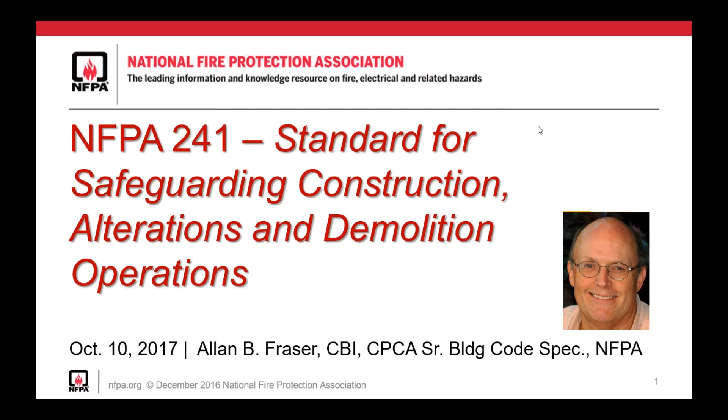Now, I'll ask you a quick question, and I know you can't answer it, but I'll give you a couple of seconds to think about it. When did NFPA, which is the National Fire Protection Association, begin to develop the standard NFPA 241 for safeguarding construction, alteration, and demolition? Now, while you're thinking about that, let me give you a little background. NFPA has been in business for about 118 years. NFPA was founded in 1896, and we develop hundreds of codes and standards for the built environment.

Now, the first National Building Code was published in 1905 by the National Board of Fire Underwriters and was immediately adopted in a number of big cities. Well, NFPA 241 about safeguarding stuff being built actually was started in 1930. It's been around for 85 years. This is part of the fire record, which was in that 1930 edition. And if you look at the top, it talks about fire resistive construction.

Now, all these fires were in New York City, and this is what brought people's attention to this problem. In a couple of decades, there were some major fires there. Vanderbilt Hotel, 1912, the Pennsylvania Hotel in 1918, et cetera. And then down below, there were a number of buildings that were ordinary construction, meaning they had wood structural members in them, and the dollar values in those.

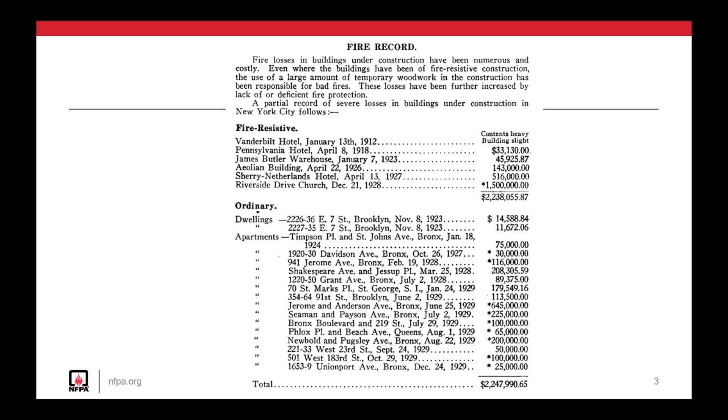Now, many of you know the name George Santayana. Very wise man, wrote many books and taught at a number of colleges and universities around the world. And from his Life of Reason in 1905, he wrote that those who cannot remember the past are condemned to repeat it. And unfortunately, it's true. If we think about those fires that started NFPA 241, more recently in 2015, the AvalonBay complex in Edgewater, New Jersey, lost 2/3 of its 235-unit complex in a major fire. There is no estimate on the damage of that fire at this point.

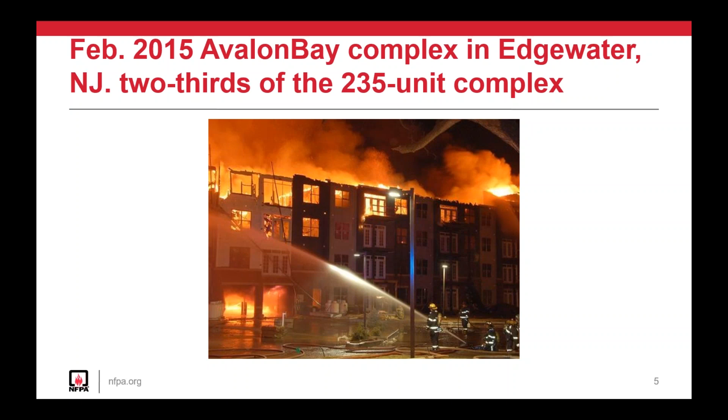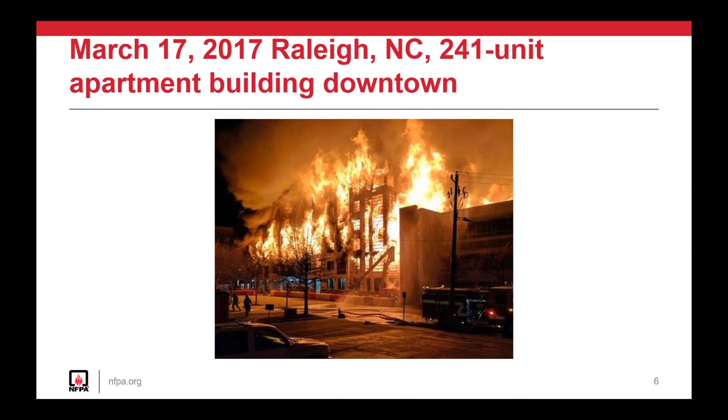March 17th of 2017 in Raleigh, North Carolina, a 241-unit apartment building burned downtown. On March 21st of 2017 in Overland Park, Kansas, an apartment tower and 22 nearby homes were burned. The fire was so intense, as you can see here, that it blew across the road. Sparks and embers started 22 homes burning.

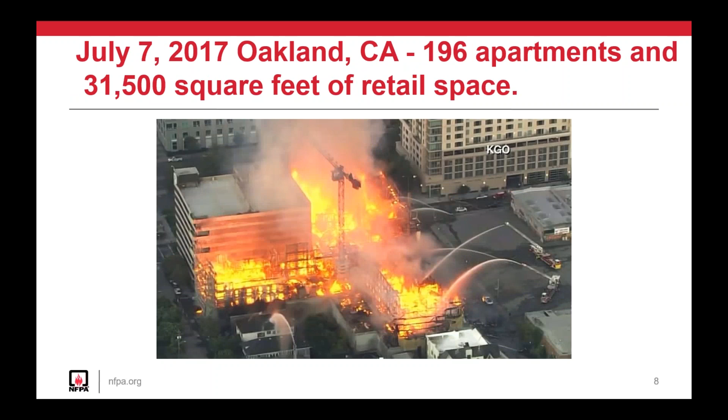So think about the extent of damage from a fire. It's not necessarily just the building of origin, but it can be many other things. It can be jobs. It can be businesses that don't open on time and revenue is lost. It can be homes across the street and what it does to families there. July 7th of 2017 in Oakland, California, 196 apartments and 31,500 square feet of retail space burned in downtown Oakland.

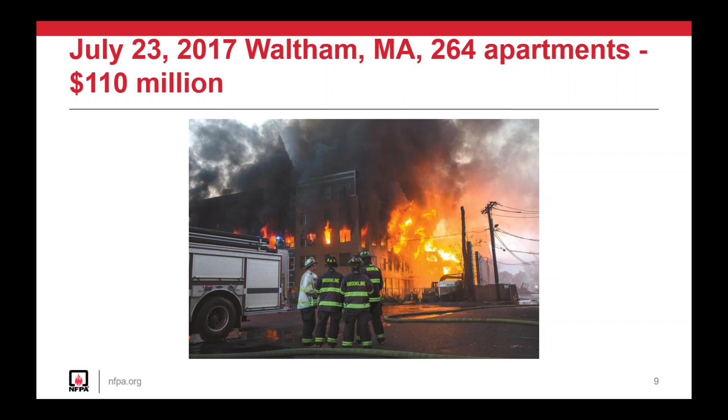Closer to home here for us in Quincy, July 23rd, 2017 in Waltham, Mass, 264 apartments were a total loss, $110 million. July 26th, 2017 in Dorchester, Massachusetts, the southern end of Boston, 83 apartments were burned for a total of $45 million in

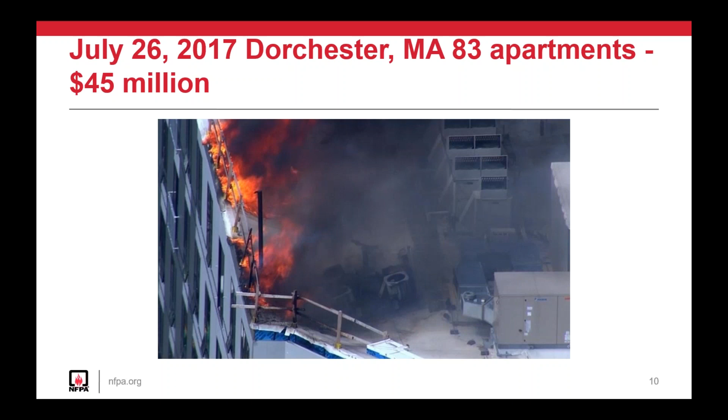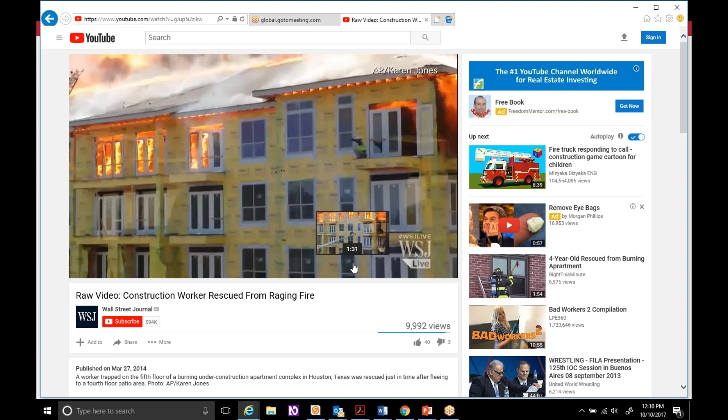It's March 26th of 2014. It's an apartment complex in Houston. This guy is on the freaking ledge. Oh, look at this. Oh my God. Where? Do they see? This is being viewed from across the street, an office complex. This building went up so fast that this construction worker is pinned on the fourth floor deck of this building. He couldn't get to an exit.

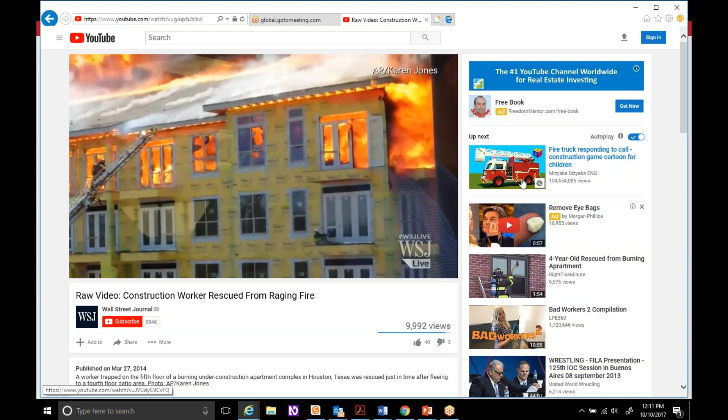But I want you to watch what happens at the end of this. It's only a 2-minute video. But in the course of 2 minutes, I want you to see how destructive a fire can be. Watch the firefighter on the ladder. He's frantic to get the ladder into a position to save this gentleman.

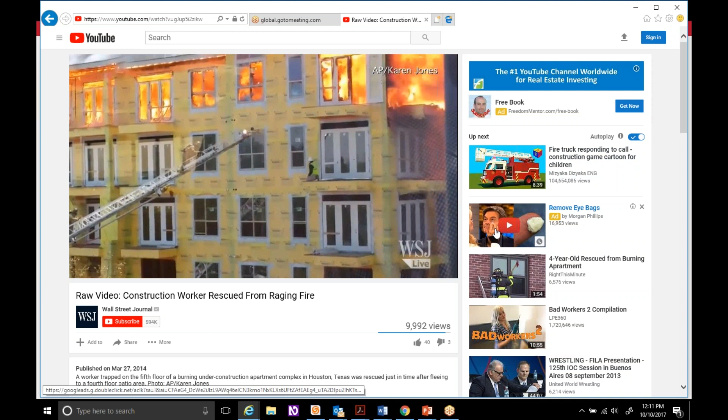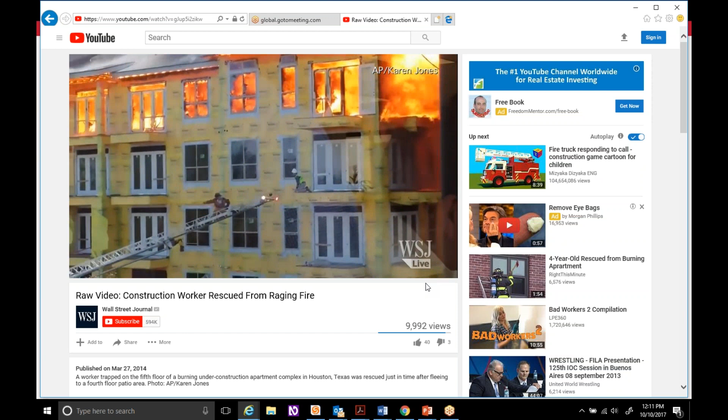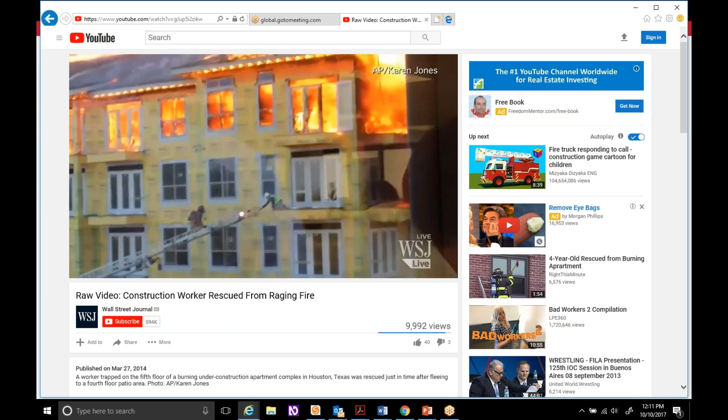Oh, Jesus. Oh, God. Oh, God. Hell, he can jump from there. I mean, good grief. See the firefighter waving his arms frantically. Oh, my God. I think that we probably should be going. Hell yes. Oh, thank you.

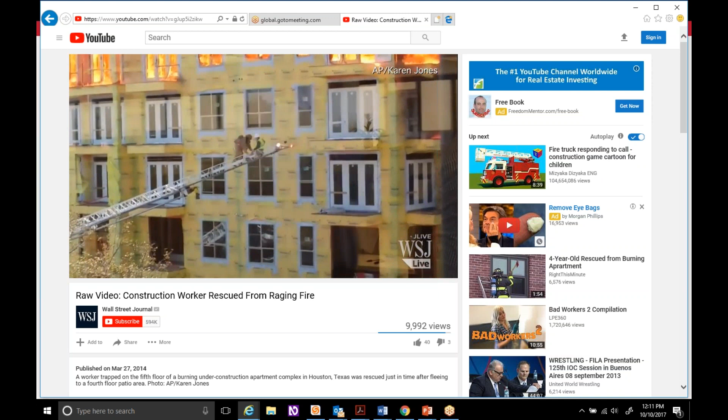Now watch in the upper left-hand corner of the screen. This is only 2 minutes during this fire.

Oh my God. Oh no, my God. Oh. Hey, what about this guy? What about the guy? They got him. Oh, okay. Pretty scary. Jesus.

Fire in buildings under construction, under renovation, under demolition can go very, very quickly.

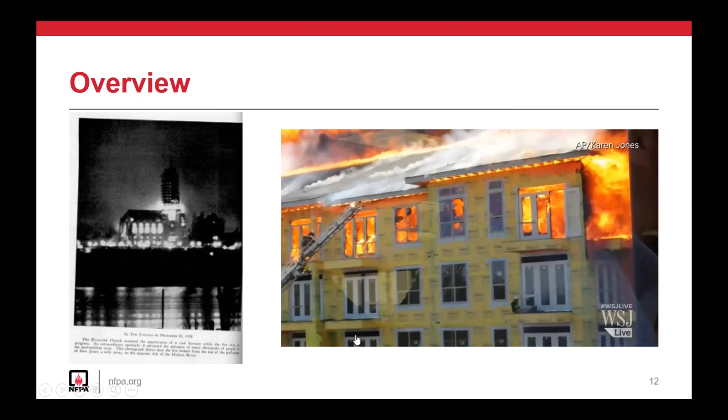Andrew, am I okay? Am I back on the screen correctly? Yep, you're good. Crystal clear.

It took 2 hours for two bodies to be recovered from the Dartmouth Street trench. Building officials are investigating the flood and the company doing the work. The company allegedly has a history of violating safety regulations, which would include NFPA 241. 241 is a unique standard. It's not a brick and mortar standard, but a standard about the process of putting brick and mortar in place. The standard ceases to apply once the building is finished, when a CO is issued.

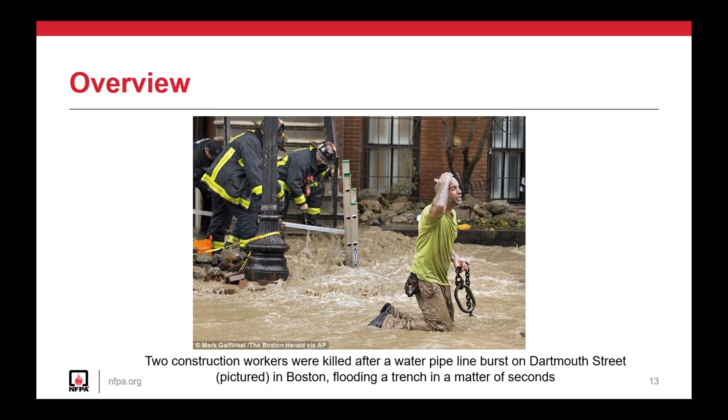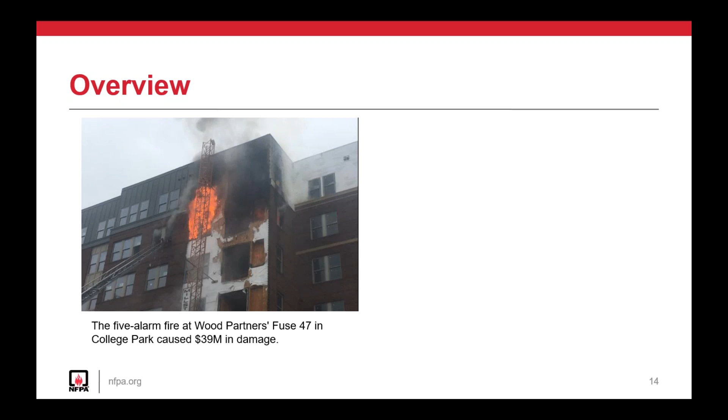Here's another fire in a building under construction in College Park, Maryland. Fuse 47 went up, $39 million in damage. The potential for extensive damage is greatest when a building is under construction because it's largely unprotected.

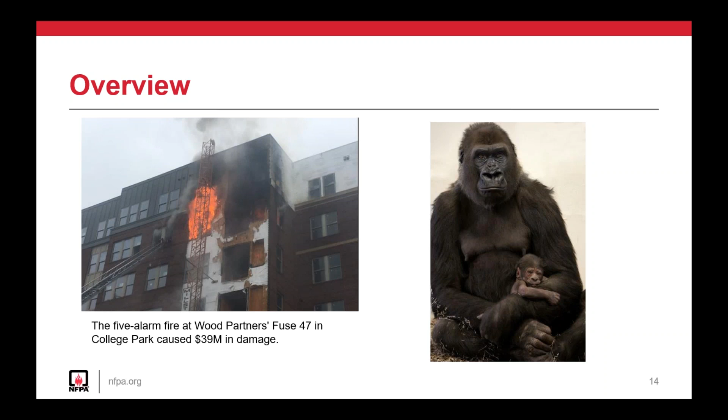If we think about a mother gorilla and her infant, mother gorilla is huge. She's strong. She's powerful. She's there. She protects her infant. Infant gorillas actually remain in contact, physically touching their mothers until they are between 4 and 6 years old, because gorillas are not fully adult until they're about 10 years old.

So much like the infant gorilla, a building under construction needs constant supervision and inspection. And this is key, which is not possible or practical by municipal inspectors. What's okay at 8 o'clock in the morning may have changed, and it may not be okay by 5 o'clock that day, or even by noontime. Construction projects today move very rapidly, and these buildings aren't ready to protect themselves.

Code required passive and active fire suppression systems such as sprinklers, smoke detection, fire alarms, and firewalls are typically non-existent until a building is near completion. Regardless of the material used in the construction of the building, wood, steel, concrete, prolonged exposure to fire without mitigation can lead to structural weakness and potential collapse.

Now, we talk about active fire protection not being in a building. That building in Boston that burned was finished or virtually finished. Sprinkler systems were in, the standpipes were in, they were all operational, they were filled with water, but the valve was turned off because the contractor and the building owner were waiting for the fire department to come in and

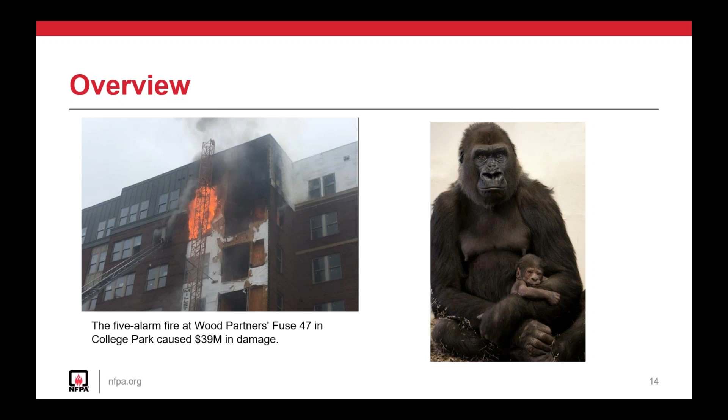inspect the sprinklers. Now, that fire started, construction workers could smell fire literally for an hour and a half. They smelled smoke. They knew something was going on. They didn't report that to the fire department for an hour and a half. Had those sprinklers been on, that fire would have been extinguished.

Now, buildings don't spontaneously combust. There has to be an ignition source. And fires that occurred during the construction process are most often attributable to human error or a lack of understanding and training. Ignition sources include, but aren't limited to, temporary heaters, welding, cutting, grinding, soldering, and roofing of various kinds.

These ignition sources aren't permanent, and they're brought onto the site and into the building by people who need to use them. They may only be there for a day or two, but one mistake in the safety procedures for using them can destroy the building. It can spread to other buildings.

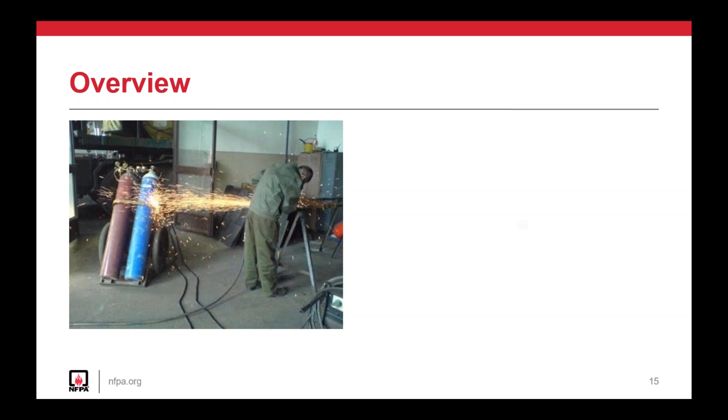There are a lot of hot things that we use in construction that need to be watched. And today we work in different trades in so many silos with nobody watching what's going on. And these massive construction fires are generally a result of that.

Such fires are apt to cause losses far beyond the actual physical property destroyed. They delay completion of the building with a consequent loss of revenue. Important business projects contingent upon occupancy of a structure on a given date may thus be seriously delayed, even by a fire that causes relatively small direct loss.

In instances where a fire starts during non-work hours, arson may also be possible, and appropriate security must be considered. That $110 million condo project in Waltham that burned to the ground was arson. There was no security on the site. There were no fences around the site. There were no cameras around the site. Now think about that. What is the cost of that security during construction relative to a $110 million loss? My argument is it's peanuts.

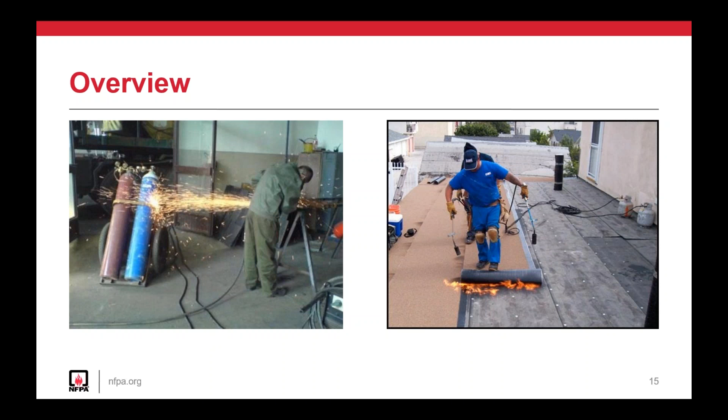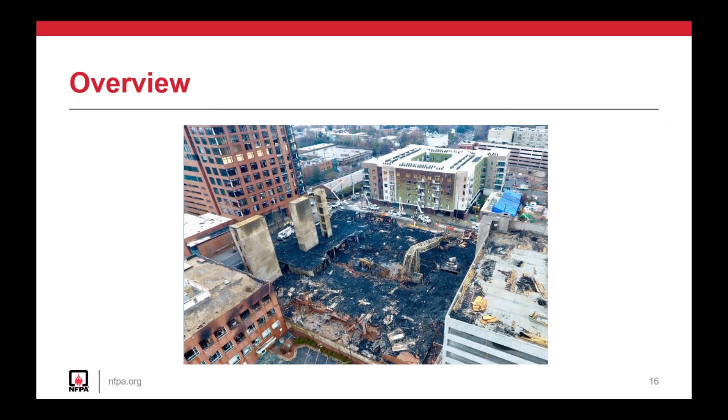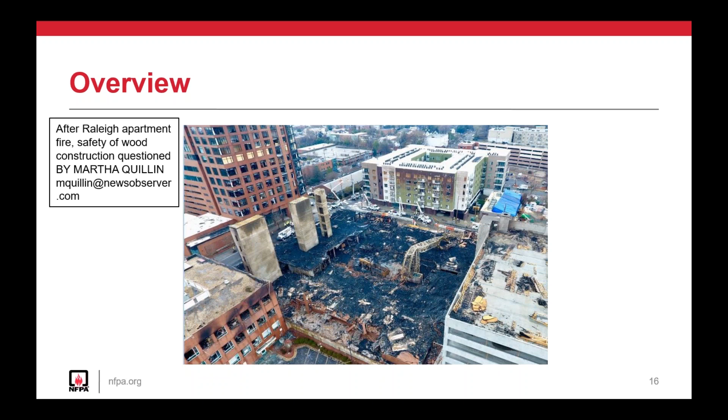Now, fires in buildings under construction generate extensive media coverage, and businesses with good reason don't like that kind of media coverage. Here's an example. In that building downtown Raleigh that burned, that picture you can see there, "After Raleigh apartment fire, safety of wood construction is questioned," is the headline. Well, I just told you, it's got nothing to do with wood construction. That didn't start the fire.

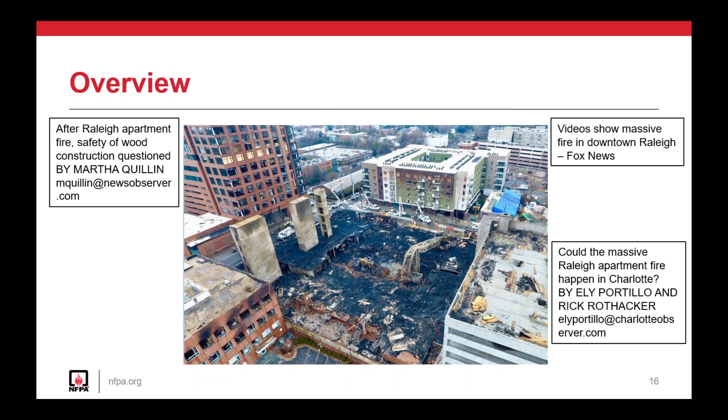"Could the massive Raleigh apartment fire happen in Charlotte?" Now we're panicking the Charlotte construction community and the Charlotte business community. "Videos show massive fire in downtown Raleigh." I understand this is good press, it's spectacular, but it's also the result of mistakes. "Massive fire engulfs Raleigh apartment building under construction," Associated Press.

"Fire chief: apartment building inspected 50 times before the blaze." Well, I'd already told you that municipal building and fire inspectors can't possibly do the job that's required to protect construction operations. He's done this 50 times. Well, the building's probably been under construction for 360, 400 days. So how many inspections and what length of time were actually conducted? "Monstrous fire destroys apartment building in Raleigh."

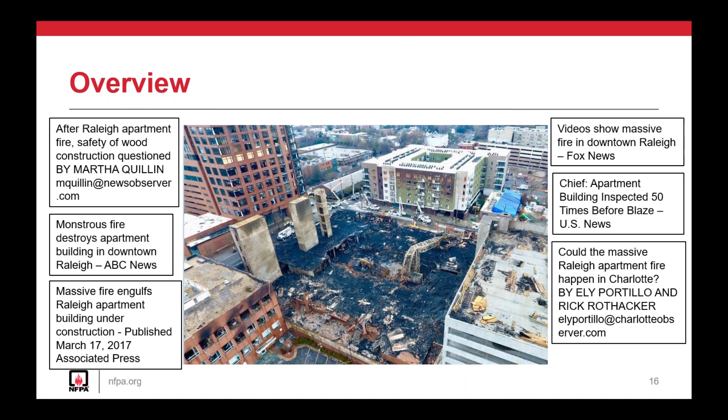So you as facility manager, your building owners, what's the key to success here? Well, NFPA started writing the keys for success back in 1930. And those that have observed them have been successful. We haven't had major fires in construction with those buildings. And in NFPA 241, Chapter 7, the building owner is required to hire a fire prevention program manager.

And that fire prevention program manager has the authority to enforce the provisions of NFPA 241 and other applicable fire protection standards. So the fire prevention program manager needs to have knowledge of the applicable fire protection standards, available fire protection standards and fire inspection procedures. So we're talking about an individual, a man or a woman, that gets hired as a fire prevention manager that needs to know an awful lot, not only about building construction, but about fire protection and the process of construction.

We're talking somebody that's going to command salaries in the six-figure range, possibly $150,000, $200,000. And security measures, if they're going to use fences and cameras and whatever. So you might have an expense of $300,000 a year. But the folks that originally started this code and the folks that now write it believe that it's very cheap insurance. If you spend $300,000 to prevent a $100 million fire, that's probably a good investment. You need to have a fire prevention program.